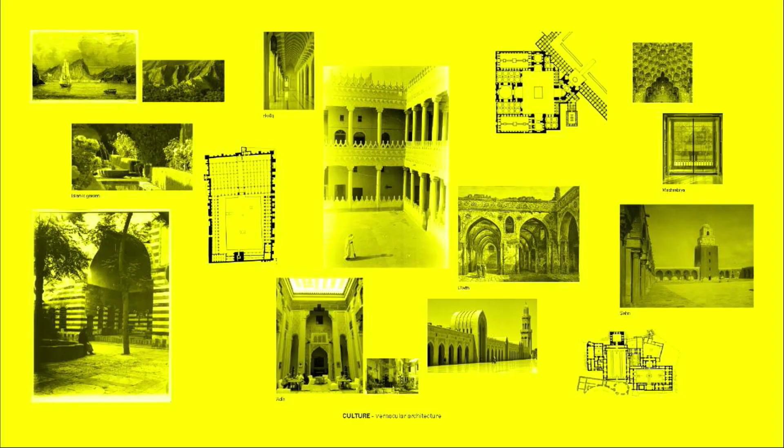It's our first time in Oman, but we have for a long time had a fascination with Arabic Islamic architecture. You see here a number of images that represent this fascination. We are fascinated by the orthogonality of the plan. We are fascinated by the sequence of typical spaces, typical typologies that you can see here, such as the Liwan, the

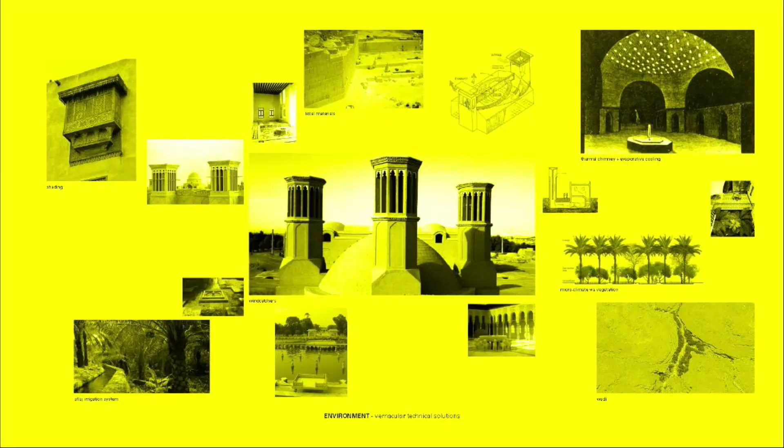courtyard, and so on. And basically, our project is based on these typologies, not only on the architectural aspect of them, but also on the traditional techniques that have been used for ages to adapt to the climate. So you see here a series of issues that interest us very much.

Maybe at the center, the most important one are the wind catchers that were used everywhere in the Arabic world before there was air conditioning. Also gardens, wadis, and so on; all of these techniques are integrated in our project. Basically, our project consists of a marriage between today's techniques and these traditional systems.

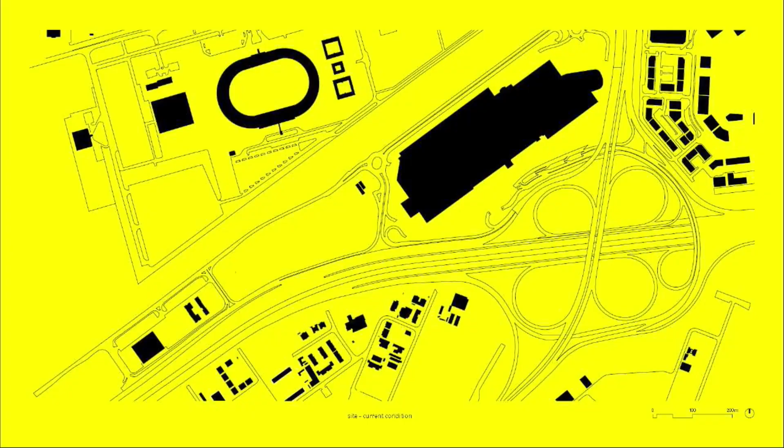The site is a kind of peripheral situation with two very large venues, the mall and the stadium. And today it is very much dominated by infrastructure, road infrastructure. But the potential is that it evolves later on into a more urban configuration, a more urban fabric. And our project is also based on this potential.

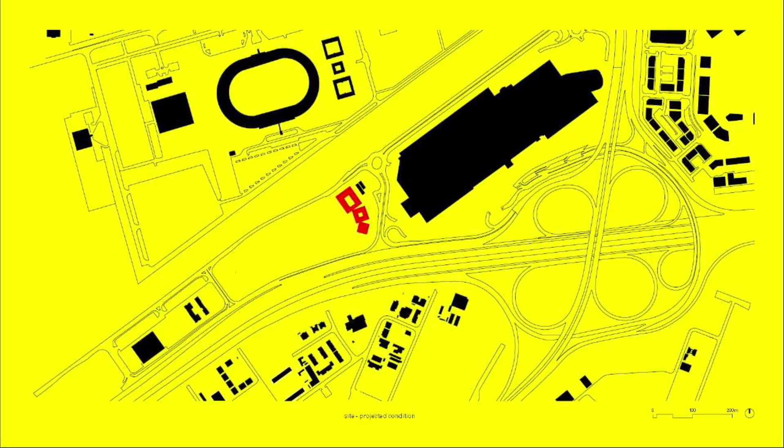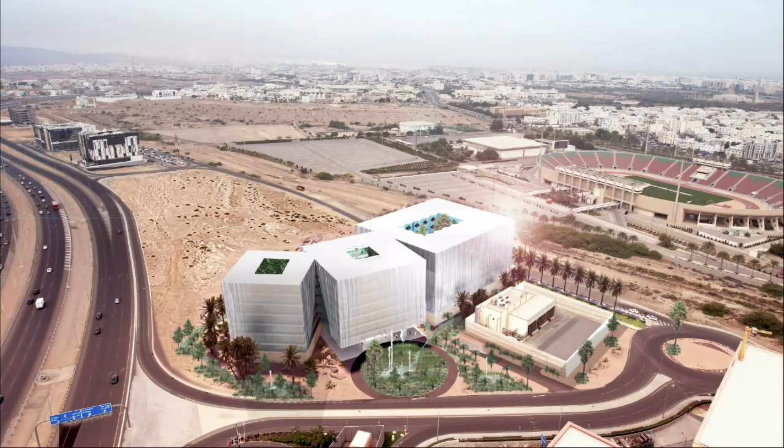As you can see here, the scale of the new project is rather small compared to what already exists. It is also very much articulated and in fact directed onto the infrastructural venues that are already in place. And by using these very elementary orthogonal forms, cubical forms, we address the different scales of infrastructure. I will come back to that in detail.

The site is irregular, and the program on it is quite vast, around 25,000 square meters. This is just a diagram, and the first move we propose is that this program is split, of course, at least in two, because there is a hotel and offices. But in this case, in order to address ourselves better to what exists already, we propose to divide the program in three parts, the two small ones being the offices and the big one being the hotel.

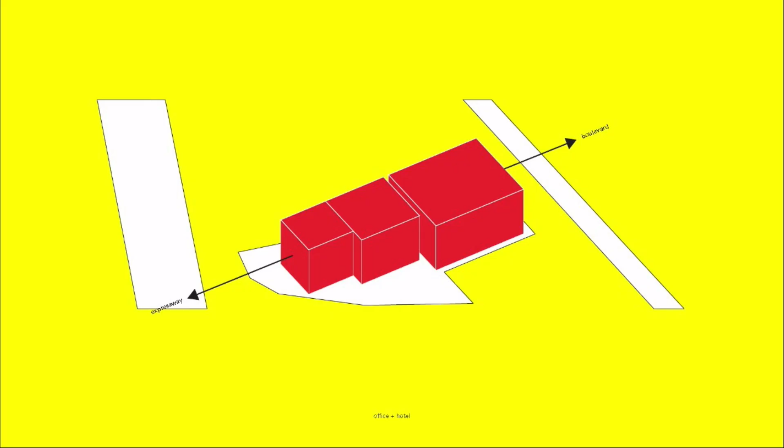The hotel is directed towards the boulevard, and the offices are directed in different directions towards the expressway. And this is how we configure the three elementary volumes. They create interstitial spaces, which you see here in white, and we have an explicit direction towards the existing, but also towards a new plaza that we propose in front of the entrance, which you see at the bottom of the image, which we propose as a main entrance to the offices.

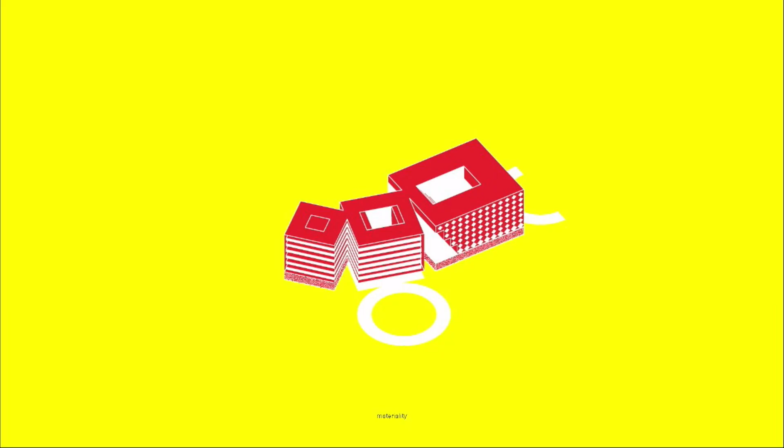Then there is, of course, a difference in facades between hotel and offices. Offices have basically open floors with floors that stick out of the facade in order to protect the inside space from the sun, while the hotel has a more perforated volume. But more importantly they are wrapped or covered by a screen, a metal screen that runs all over the three volumes, of which some parts can be removed. For instance, in the interstitial spaces, we don't always need this curtain.

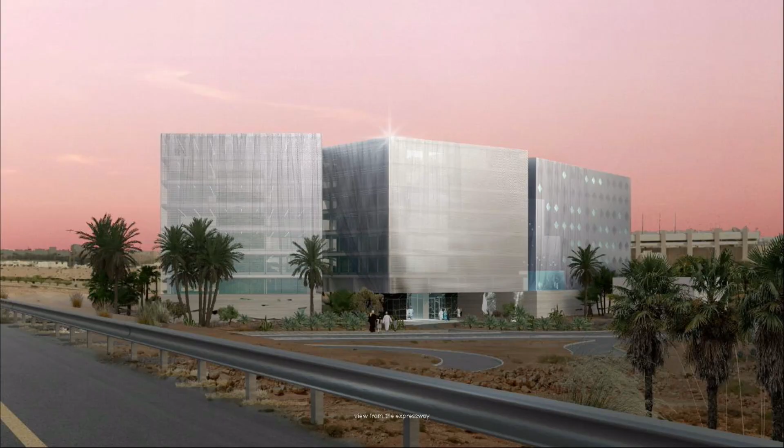A curtain that is in metal, that has a certain brilliance, that moves slightly with the wind, and that first of all protects the different functions from the sun. It is made of stainless steel, and I will come back to it later. So as you can see here, the three volumes are based on a plinth that is rather closed, that sits especially under the first and the third cube, while the middle one is raised and is a kind of a portico with a main entrance to the office spaces, which you see here.

The middle volume is floating. There is a portico under it. There is the main entrance to the offices, and one walks towards the light that comes down from an atrium that sits in the middle here.

And probably more important than the three volumes, which in an efficient way organize all of the demanded square meters, we propose a series of interstitial spaces that are based on these traditional typologies, like the Liwan, the Sahn courtyard, and the Riwak portico. And they wander through these different volumes. And what you see here is how the three cubes are organized around these collective spaces.

On the right, you see the courtyard around which the hotel is organized. And it's not a simple orthogonal courtyard. It has a large window towards the city. It has a stepped facade on the back. And so the whole hotel is directed onto this very well tempered atmosphere of the courtyard.

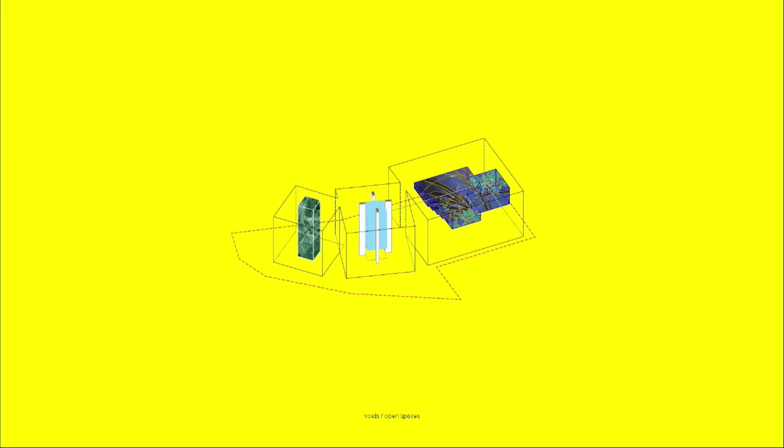Then in the middle, there is an atrium on top of the portico, and in white are indicated these wind towers that we integrate to cool the offices. While on the right, there is a closed core, which contains basically the same kind of chimneys and all of the vertical circulation. A reference image for the courtyard.

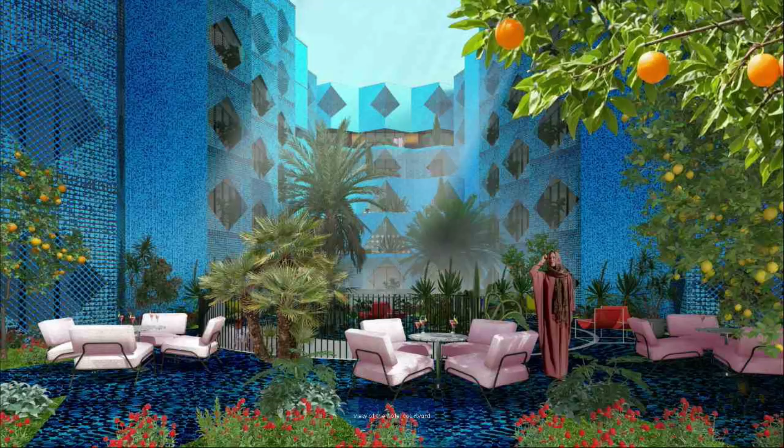It is very intensely planted in our eyes, and it has water features in order to create a climate that is cooling the whole space, with lots of rooms looking onto it from a facade made of mashrabiya that cover the terraces that sit around.

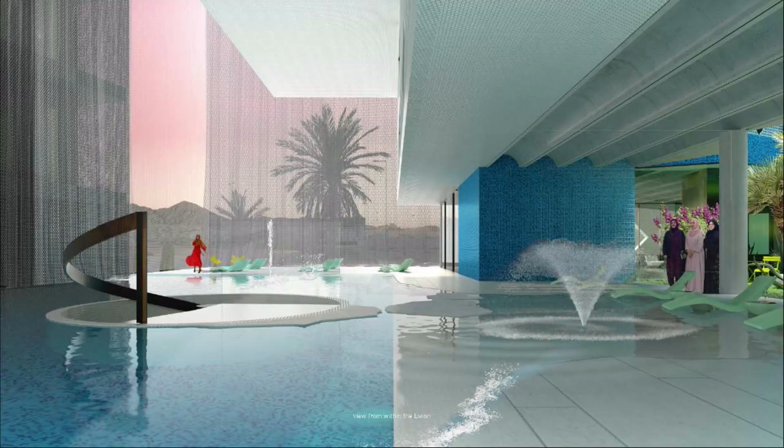Then there is the Liwan, which is a space under the hotel, in fact in between the hotel and the office volume, with all of the pools, terraces, and in direct link with the courtyard on the right. And this whole space, this vaulted space, is surrounded by the mesh, so that it has a climate that is very well protected against the sun.

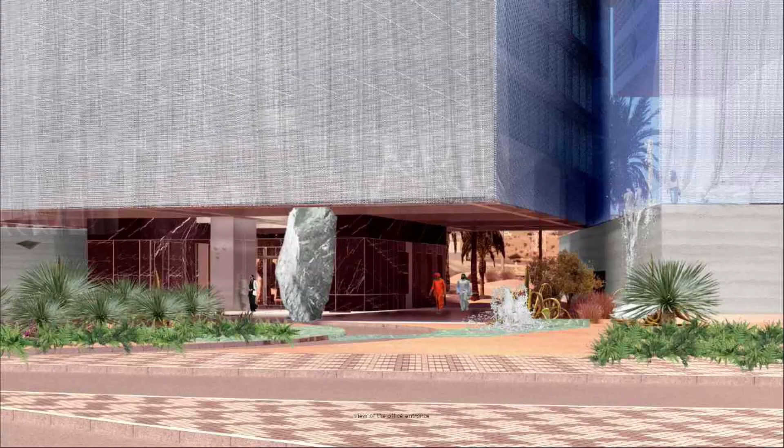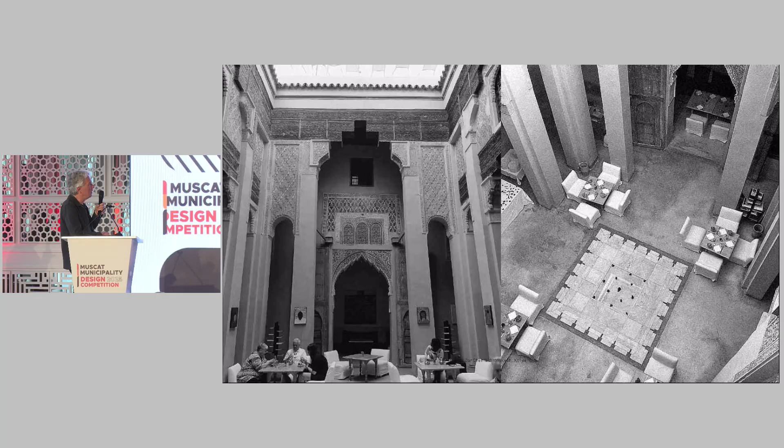Further on, there is this portico typology that we use for the entrance of the offices, which you see here. There is a drop-off situation here and an entrance to the parking garage. And one walks towards the entrance here, towards the light that comes down from the atrium. This is, again, a reference image for square atriums as they are traditionally used. And this is the way we interpreted this typology.

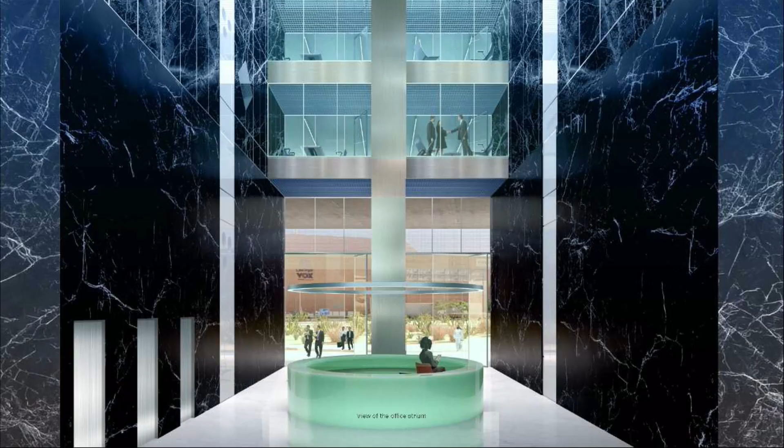We look here from the atrium towards the entrance of the office venue, towards the garden outside, and two sides are relatively closed; they are basically the cores. They contain stairs, chimneys, and elevators, and two facades are open towards the inside, which show the offices. Altogether, these in-between spaces are, in our eyes, the main quality of the whole project.

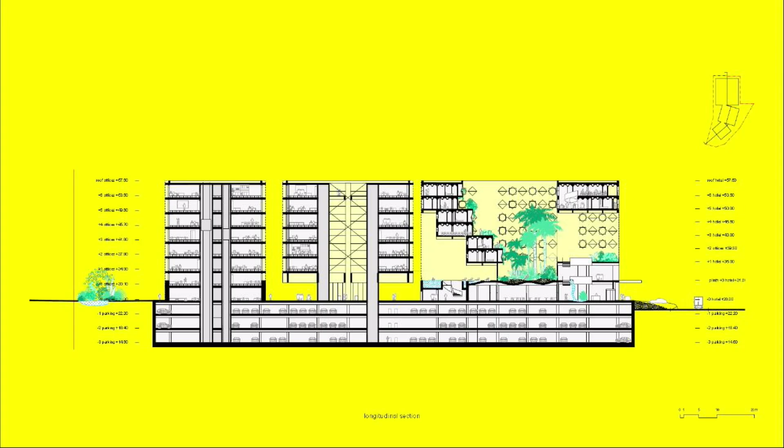So, as you can see on the left, or at least in the middle, there is the atrium. Under it is the portico, and towards the right is the Liwan, that is the stepped space that you can see on top of the plinth. And on the right, there is the courtyard with its window towards the city.

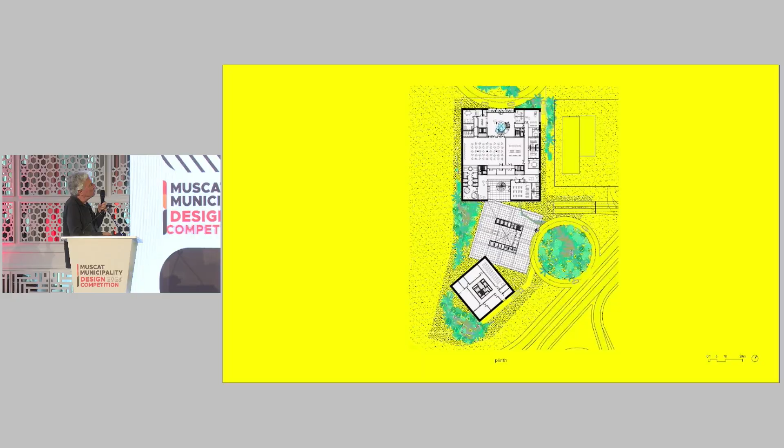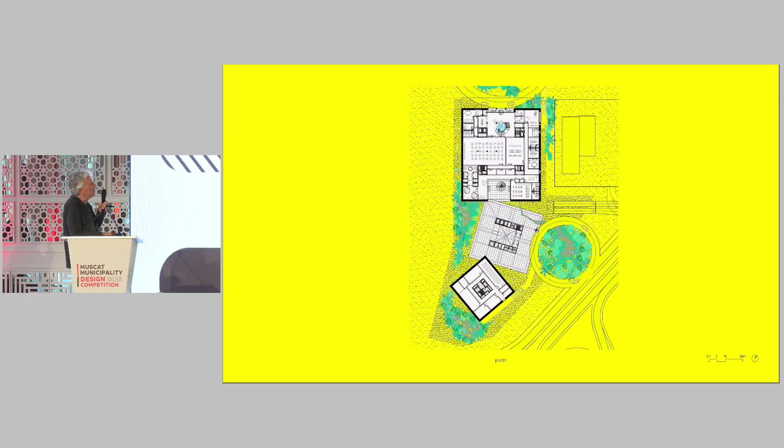This is the ground floor with the main entrance to the hotel on top of the image. This entrance is half raised above grade, and it gives a direct link to the ballroom that sits under it. Under this, on the plan, you see all the venues that have to do with sauna and so on. And they are directly linked through a stair that goes up towards the swimming pools that sit above.

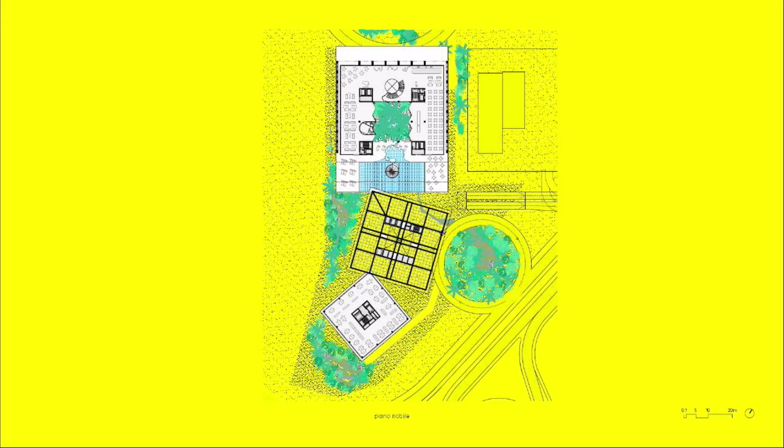Then under it is the portico of the office floor with the drop-off in front of it and the small cube next to it. We go up, this is the courtyard level and also the Liwan level in blue with the swimming pool. As the middle office block is raised, there is a floor of structure that holds the whole venue. Here is, let's say, a typical plan.

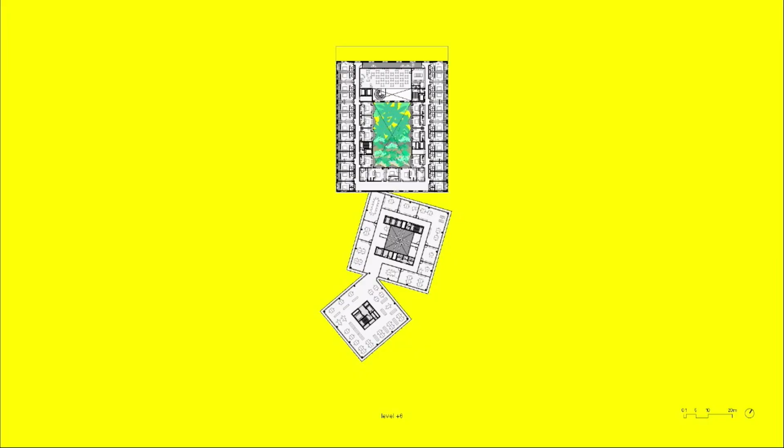It's the 6th floor, where the plan of the hotel goes all around with suites at the top, looking towards the city again. And the last floor, finally, contains a fine dining restaurant on the top level, among others. Again, the plans of the offices here indicate the different possibilities for internal organization.

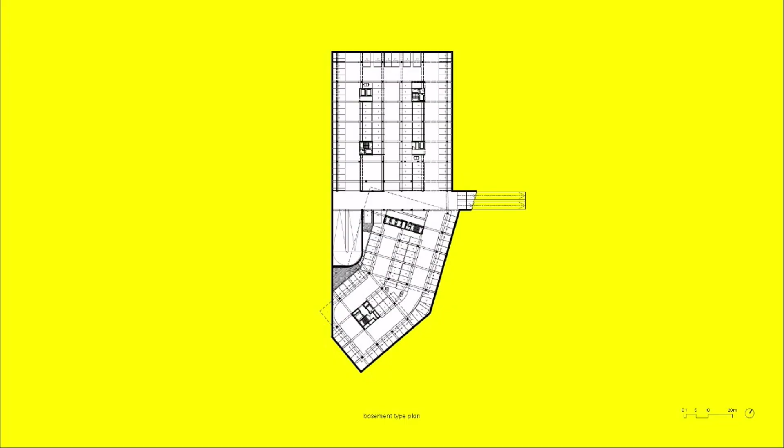And finally, the underground floor that follows, of course, the structure that sits above the 2 inclined cubes. Of course, the structure of the office floor follows. It has a ramp going down in between hotel and office functions.

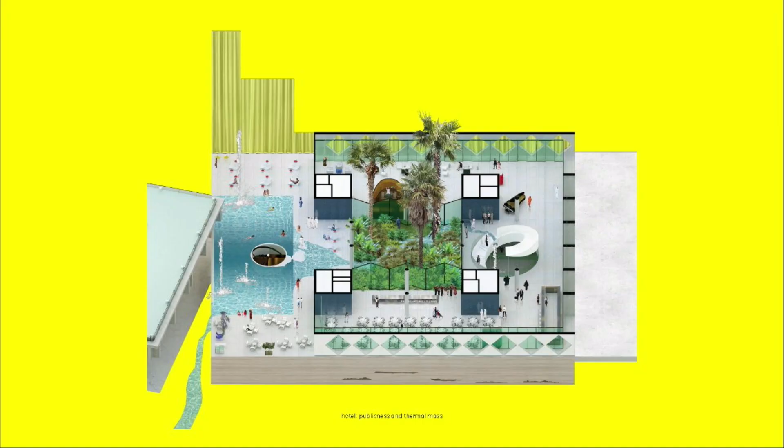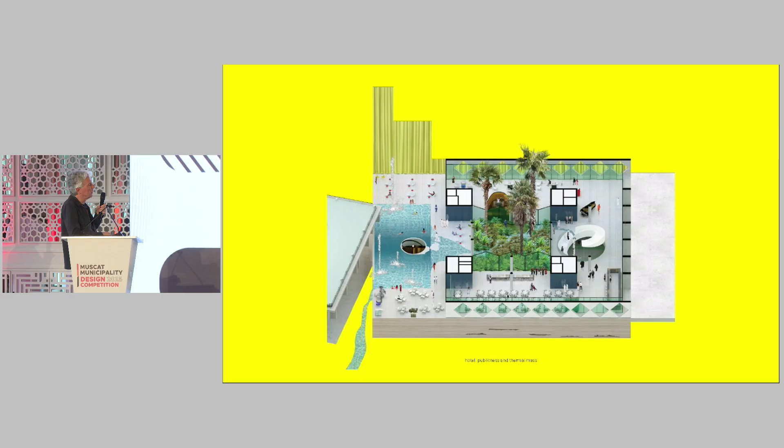This drawing shows the spatial configuration above the plinth of the hotel. As explained before, you see the swimming pool and terraces and other water features on the left, sitting in between the volume of the hotel and the offices, surrounded by the metal screen, so very well protected, and with an open connection towards the courtyard that is densely planted. The structure there is based on 4 cores that support the upper volume. And this image shows the link between the swimming pool and the courtyard that sits behind.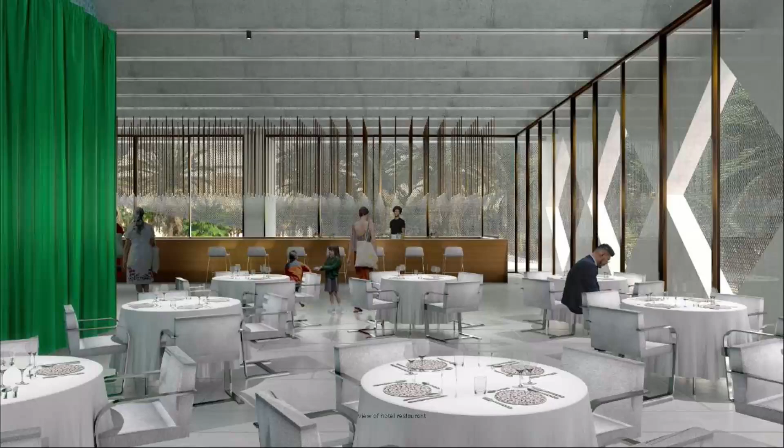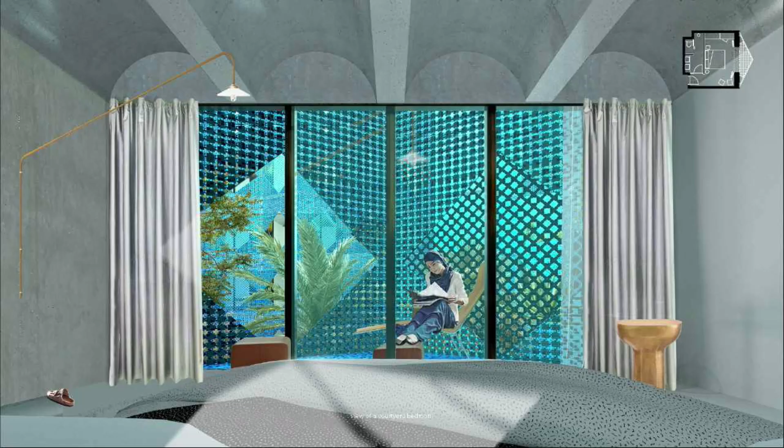An image that shows the 24 hours dining right above the plinth level, looking to the outward facades, and the courtyard is here on the left of the image. This is one image that shows a room that looks onto the courtyard. Each room has its own terrace. There is Masharabieh in front of it, and there are direct views cut out of the Masharabieh, the sun screens.

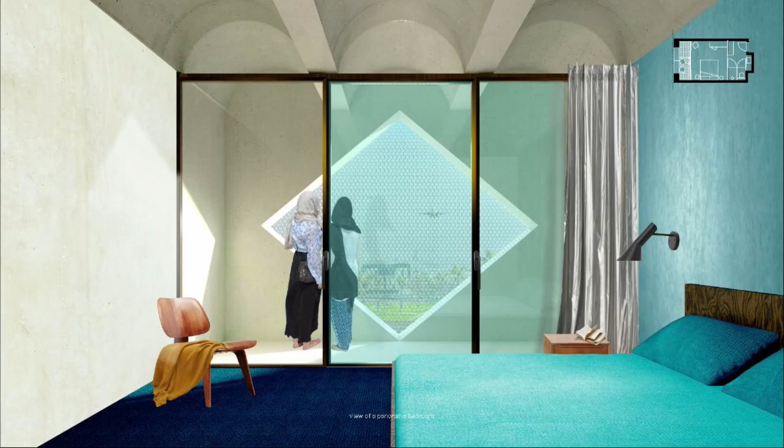Another typical room is this one, looking outwards, again with an outside terrace and a diamond form window looking outwards, with again the metal mesh in front of it.

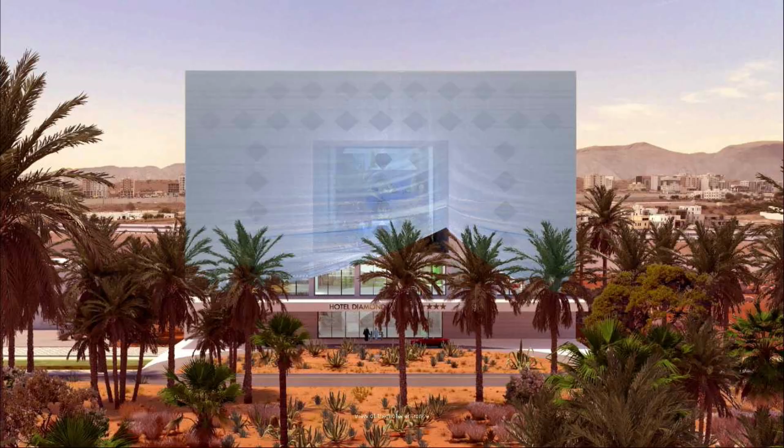This is an image from the main access to the hotel. As said before, the drop-off is half raised above grade level. You go in, and there is the venue, the lobby, basically connected through a monumental stair with the floor above, where all the lounges and lobbies and 24-hour restaurants are organized.

And above it, you see the large urban window from the courtyard towards the city. The curtain can eventually be removed, can be opened according to the most convenient situation wished.

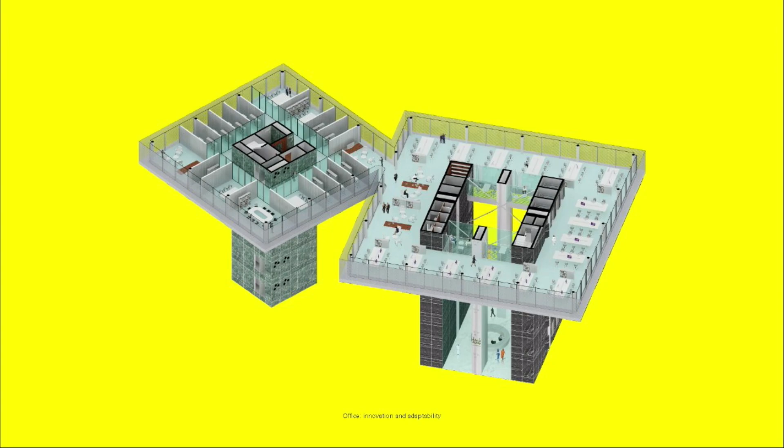And this image shows an average floor of the office cubes. As you can see, they are linked in between them, and together one office floor forms about 1,450 square meters. The one on the right is, as said before, organized around the atrium. It has two slices of longitudinal cores with the chimneys in it. And the one on the left is an enclosed core with spaces organized around it.

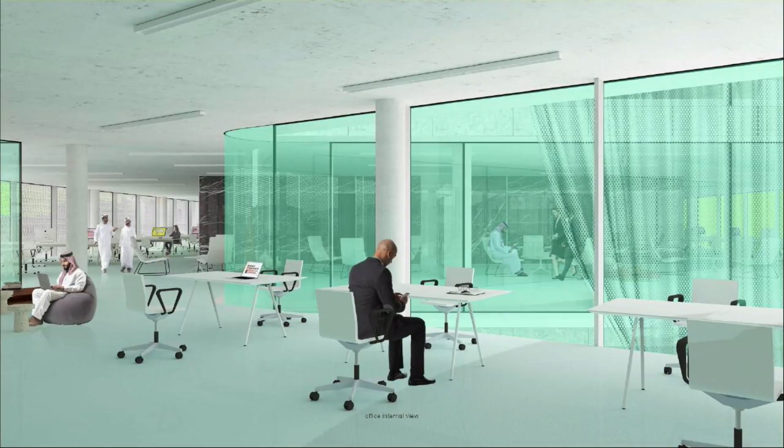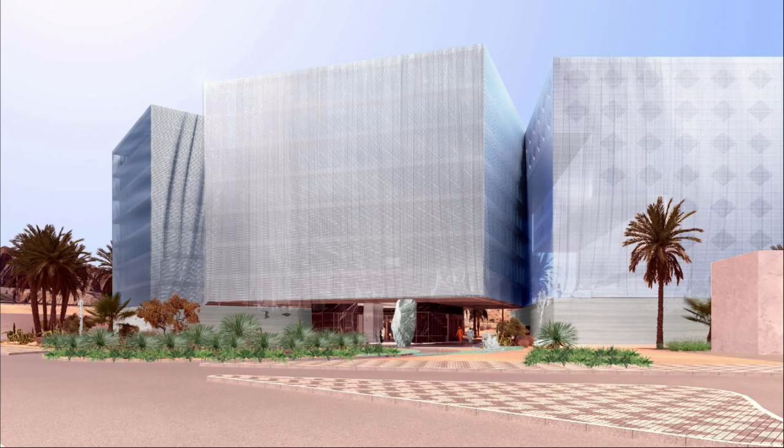This image gives an impression of the point where the two cubes are linked, and so together they form this big surface per floor. Again, an image of the access towards the offices, completely different, separate access from the hotel. They can completely function independently.

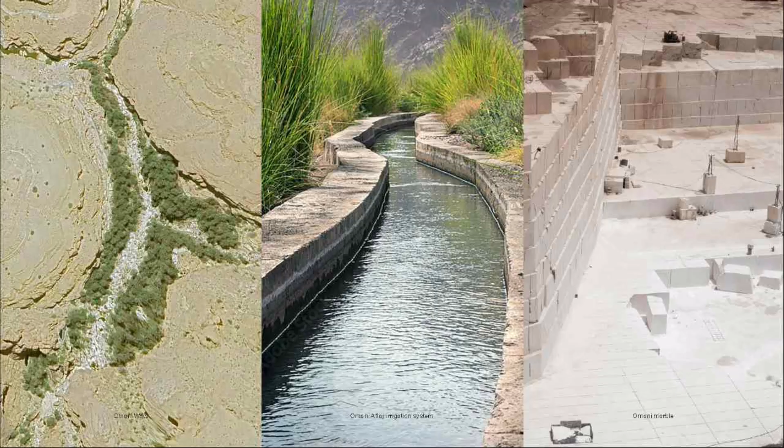I come back to these chimneys that we want to use for the cooling of the offices, but also in the organization of the garden outside. The role of water, the role of wadis to keep water, and also the use of local materials are for us a logical step towards sustainability based on tradition.

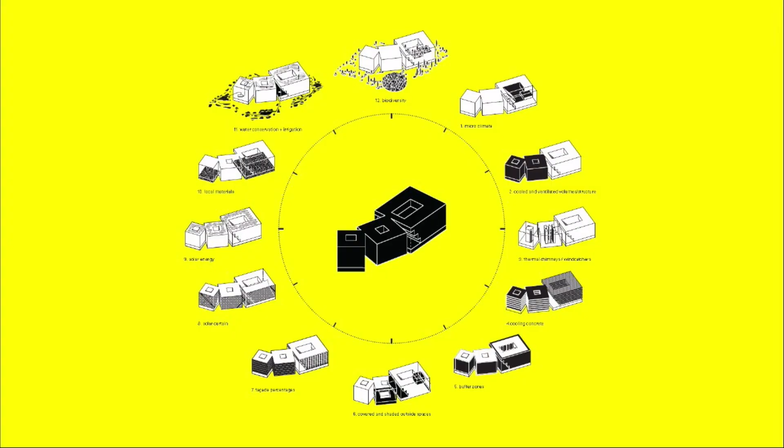And this image shows all the ingredients of our strategy into sustainability, of which I cannot go in detail, of course, in this very short time that we have, but the basis for this sustainability strategy is that we use traditional techniques, and we enhance them with contemporary technology.

For instance, here in the hotel, the climate of the courtyard, that is very well controlled through protection against the sun, through the planting, through the water features, the air of it is used to cool the structure of the hotel. As you could see in the hotel rooms, we have vaulted floors.

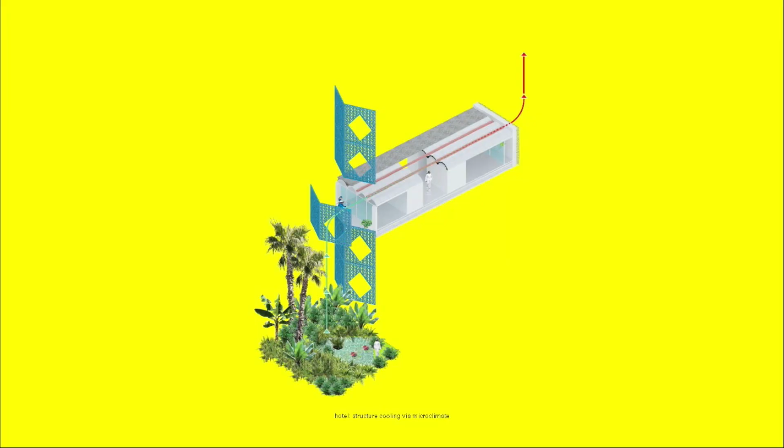And these vaults permit us to have canalizations through the building, through the floor, in order to cool the structure on a permanent basis. The air goes in on the courtyard side and goes out on the outside of the building.

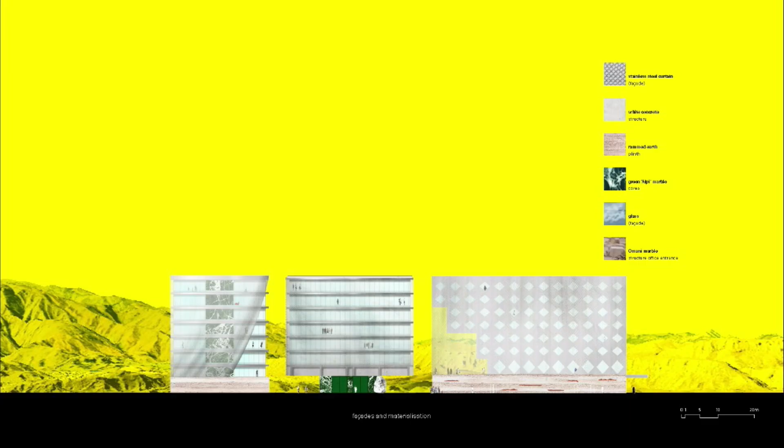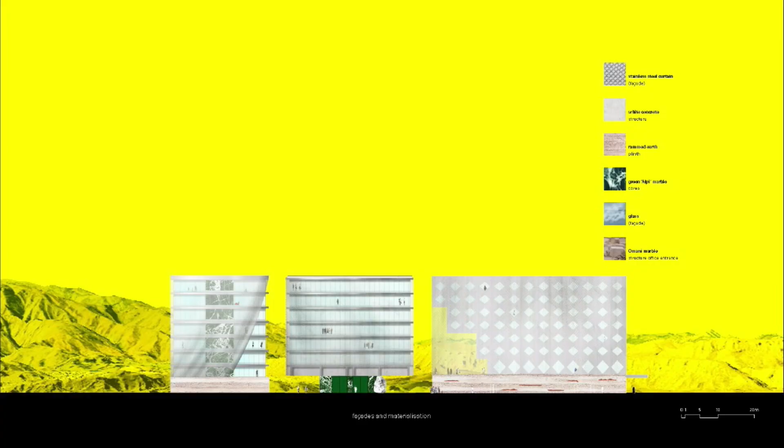In terms of materials, I already talked about the mesh that surrounds all of the buildings. There are differences in the facades. There are office floors that stick out of the glass facade in order to protect them. And then a second protection is the mesh. We use rammed earth for the plinth.

We use local stones. We intend to use white concrete, and we think that the walls, of course they can be made in concrete, but we think they can also be made in rammed earth. So a combination of material that is both based on tradition and in combination with contemporary materials.

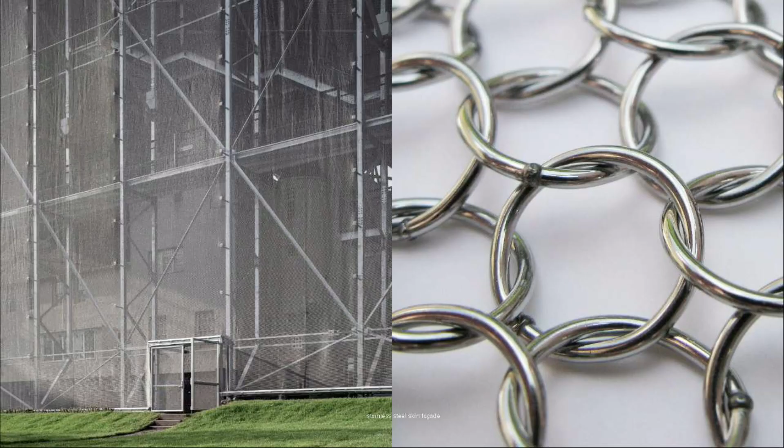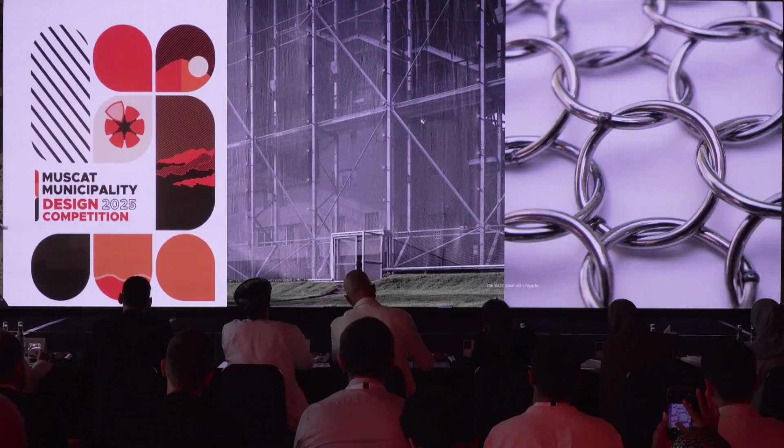This is just one image of the possible mesh. They exist in all kinds of different materials. They exist in different densities. All of this has not been precisely defined today. This example is simply made out of rings, but as I said, they exist in all kinds of different weavings in order to adapt in a perfect way to the requirements that we will find out later.

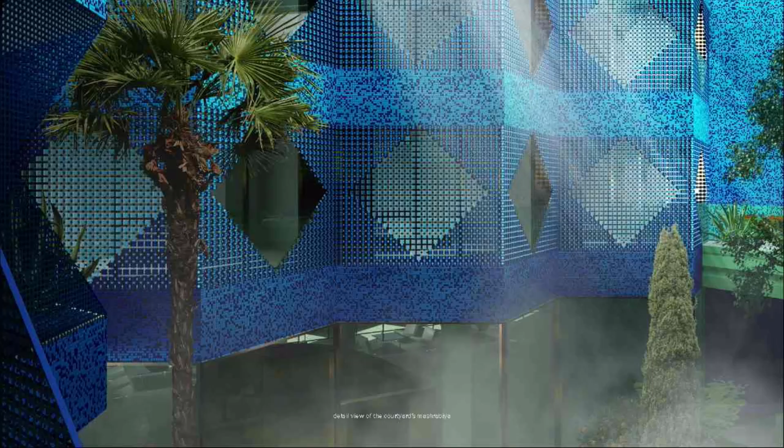And finally, this beautiful example of Mashrabiya, we want to reuse in a contemporary way in the courtyard of the hotel, of which you see the image here. Thank you very much.

It's not really on. No, it's on.

Thank you, Xavier, for that very good presentation. It's never easy being first, I think, but it was a great presentation. And it made it so much clearer having the presentation and seeing the original panels. I'd like to ask the jury members, does anyone have a question for Xavier? No, maybe.

Working. Thank you for the presentation. I appreciate the original idea, the approach that your project gets inspiration from traditional local architecture, in particular the use of Riwaq, Liwan, and Sahn. I have actually two quick questions, one at a philosophical level and the other at a practical level.

In that traditional architecture, local architecture, the three elements that you used are connected and represent the hub that provides organization and order for the social life. In your project, you choose to separate them.

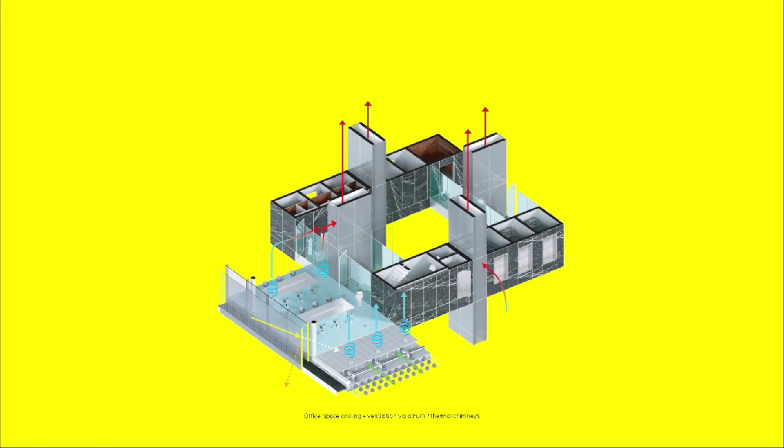So the thermal chimneys work together with the ventilation system, which comes via the raised floor, to create a temperature which is basically always between 18 and 22 degrees Celsius. To avoid not having enough natural draft in the chimneys, the thermal chimneys stop at the natural height limit of the building, and the top floor is not connected to the chimneys. So we still have a 5-meter draft. It's a system we've proposed and used in a number of buildings throughout Europe, developed to create a passive conditioned building. It's not air-conditioned, but you can still guarantee a cool temperature.

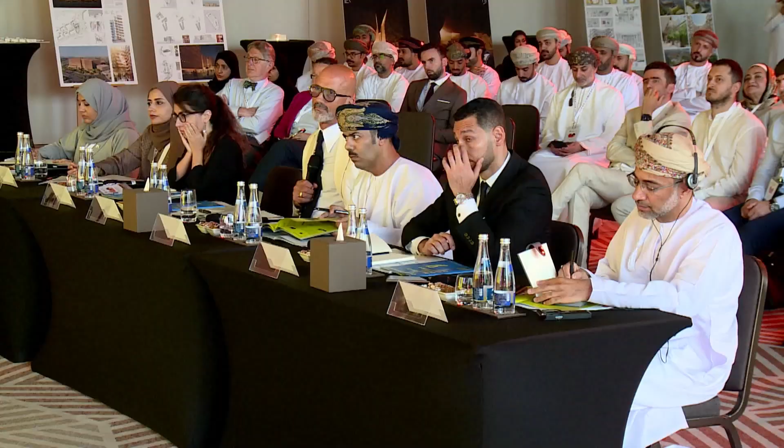In some ways, it's relatively complex, but the principle is very simple. And for us, it was extremely interesting to find that a system we've used in Europe in a high-tech methodology had precedents in Oman already in traditional architecture. So, as Xavier said, this combining of traditional ventilation and cooling techniques with high-tech techniques was already suggested to us. I don't know if I've answered your question, but if you wish a more technical discussion, I'm very happy to discuss relative temperatures. It is a system which is tried and tested and in place.

Do we have any more questions?

I find everything very interesting, in particular, let's say, the grid and the reorientation of the cube. What I want to understand more, as my colleagues asked, is regarding the mesh, because while I see many, let's say, ventilation systems, etc., on the other end, the metal mesh captures the sun, and the glass that you have as well.